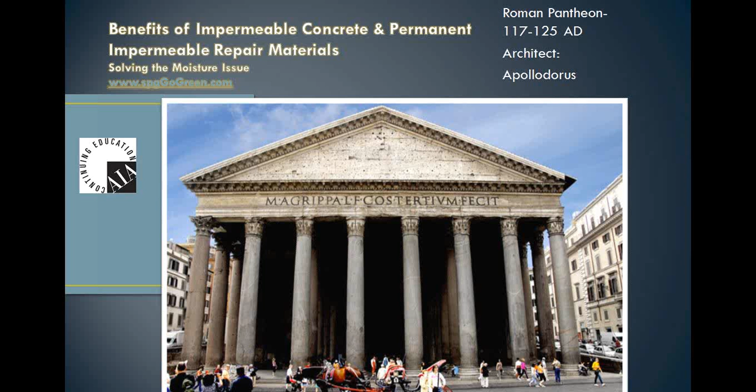Pictured on the screen is the front of the Roman Pantheon, and this building is 2,000 years old. It's just disgusting that we as a society can't come anywhere near that. The 9/11 memorial that the Pentagon had designed, they requested that it last 100 years. We need to change this philosophy.

Today we're going to learn about VOC rules, reasons, impact, but most of all we're going to learn how to make the world a better place to live through the medium of concrete.

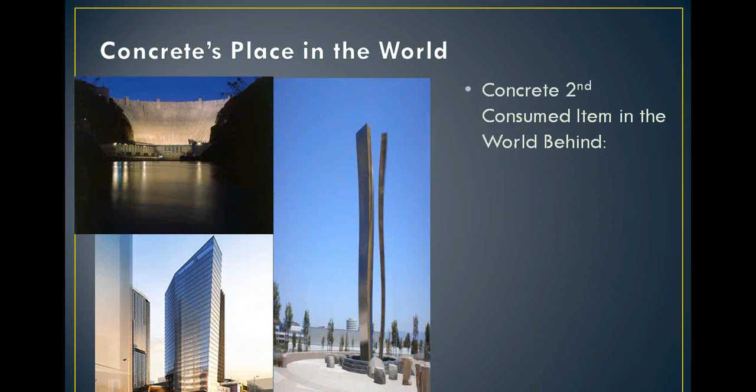Concrete's place in the world is really everywhere. It's the second most consumed item in the world behind only water, as measured by weight.

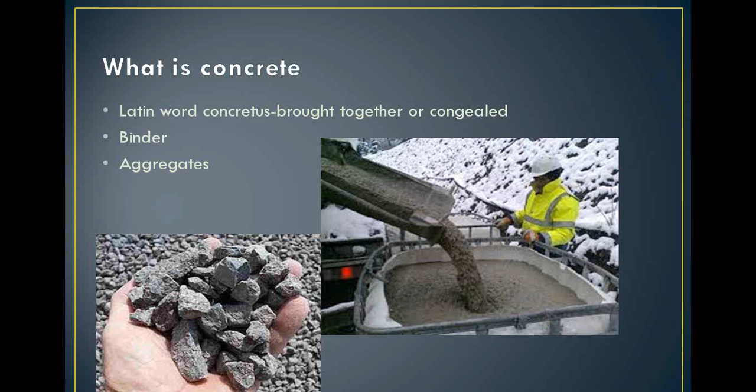Concrete comes from the Latin word concretus, meaning brought together, and it consists of a binder and aggregates. In this case we're looking at Portland cement and stone, but it could be Elmer's glue and diamonds. That would also be a type of concrete. Not sure what you'd do with it, but there you go.

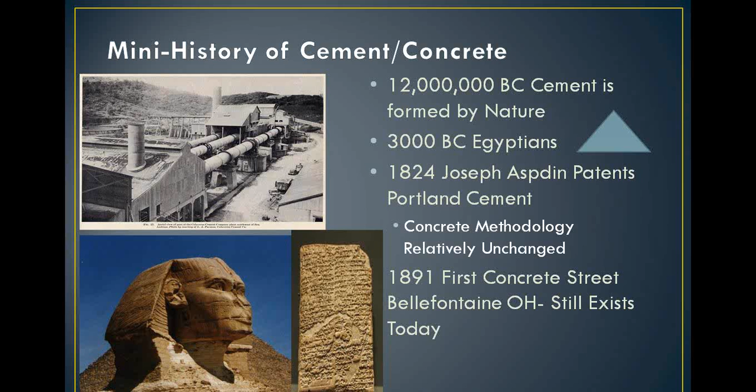Nature formed cement 12 million years ago. And in 1824, Joseph Aspdin patented Portland cement as we know it today.

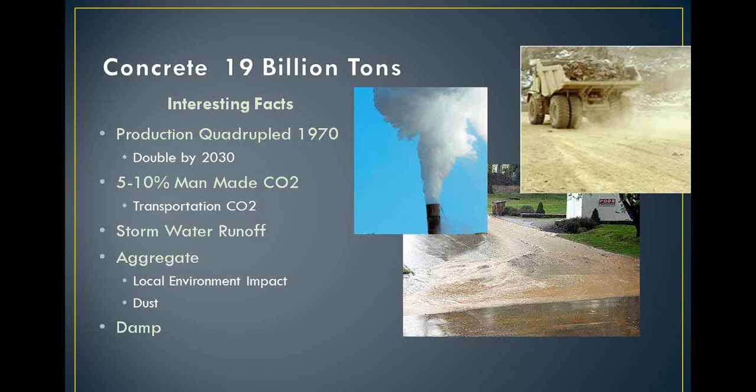19 billion tons of concrete were produced in 2010 - a little behind on my numbers. That's quadrupled since 1970, and will easily double by 2030. The best, most accurate guess we can arrive at is that 8% of man-made CO2 is created through the process of cement production.

So to give you a frame of reference, when you see a full concrete truck driving down the road, it has 18 million BTUs worth of Portland cement in the back of it.

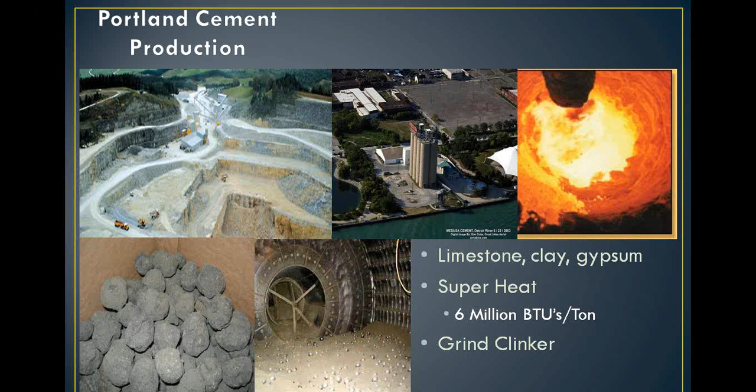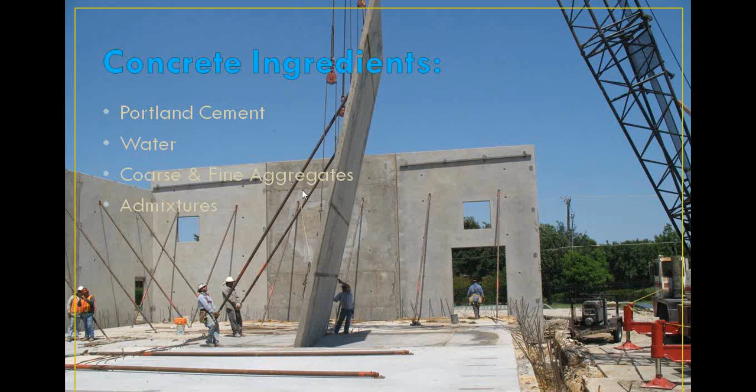Concrete is comprised of Portland cement, water, stone, sand, and admixtures. Not an inch of concrete gets poured in the civilized world without some sort of admixture in it. If you were to take Portland cement out of these ingredients, what you'd have is a pile of wet rocks and sand. So that's where we need to look carefully, because that's where the magic happens.

75% of Portland cement is comprised of tri- and dicalcium silicate. When these silicates react with water, they form calcium silicate hydrate and calcium hydroxide. This is what provides the early and long-term strength to concrete. The additional materials form the completed matrix of the concrete, and that's what you have.

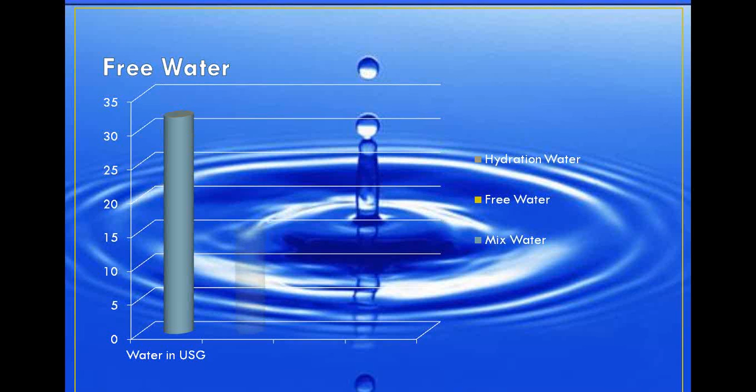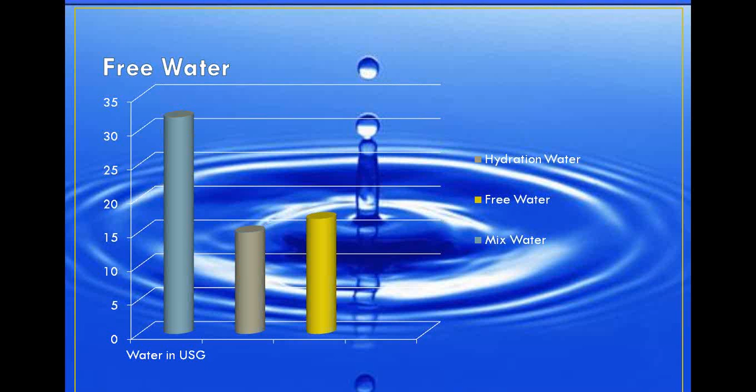What we're here primarily to discuss today is free water. When they make a cubic yard of concrete, they start out with, give or take, 32 gallons of water. That chemical reaction we just looked at, Portland cement and water, uses less than half that water, leaving you with approximately 17 gallons of free water, or water of convenience, in the concrete.

I customize these presentations to each architectural firm that I go to, and this was one of their projects where I most recently gave this. It's a 184,000 square foot hotel, and inside there would have been 38,000 gallons of free water in the concrete slabs, waiting to come out into the occupied space.

A cubic yard of concrete at 4 inches thick covers 81 square feet. So every 8 by 10 area you see at one point in time contained an extra 17 gallons of water. Imagine if I was to dump 3 five-gallon buckets of water into your walk-in closet - you'd be up to your ankles in water. Well, that's what's in the slab. And if it was 6 inches thick, it would be nearly 60,000 gallons of water in there.

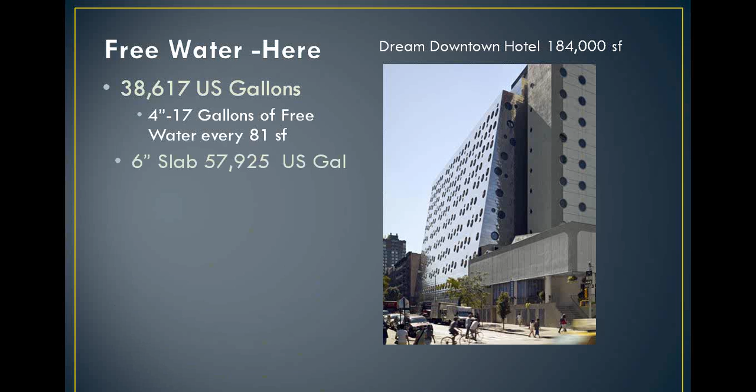Concrete drying times - the ability to get rid of this free water or extra water - are considered to be 40 days per inch of thickness by all industry experts, including myself, under ideal conditions. And these ideal conditions consist of an enclosed, conditioned space. So you build your building, turn on your HVAC, and that's when the exchange of moisture truly begins in earnest with traditional concrete.

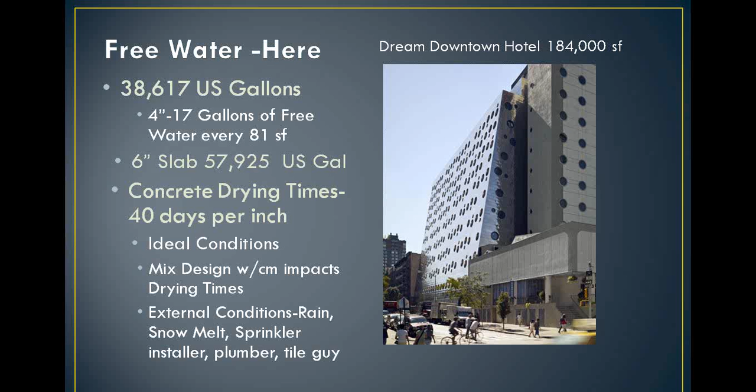Inside that concrete slab, it's 100% relative humidity. And when you condition the space, it now becomes 50%. That exchange is going to occur from the high to the low. And this happens frequently 10 minutes before the flooring installer gets there or the roofer arrives on site.

And this has become a problem because in 1999, the EPA, in an effort to protect us and future generations, lowered the allowable VOC limits inside the building envelope through the Architectural and Industrial Maintenance Coatings Act. And where that had a huge impact was on flooring adhesives.

While they could certainly have the moisture pass through the flooring adhesive, it's going to hit the impermeable membrane of the flooring sitting on top of it and blow it off. And now more and more manufacturers in every phase of construction are beginning to make products that contain no VOCs, and it's extending to roofing, fluid applied air barriers, etc.

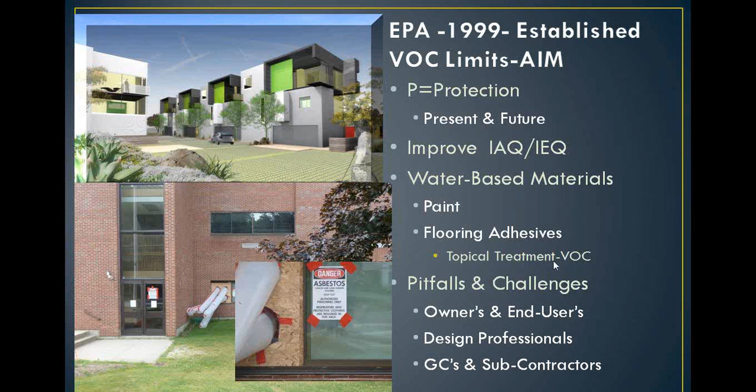Until we came along, the only legitimate solution was a topical treatment on top of the concrete to slow the moisture's passage through to the material. And it travels through the concrete through the bleed channels.

When concrete is first placed, the heavier materials settle to the bottom, water is pushed out, and bleed channels are formed. These bleed channels provide a perfect path for moisture vapor emission to leave the concrete, come up, get underneath this impermeable moisture membrane of a floor, and re-emulsify this now water-based adhesive.

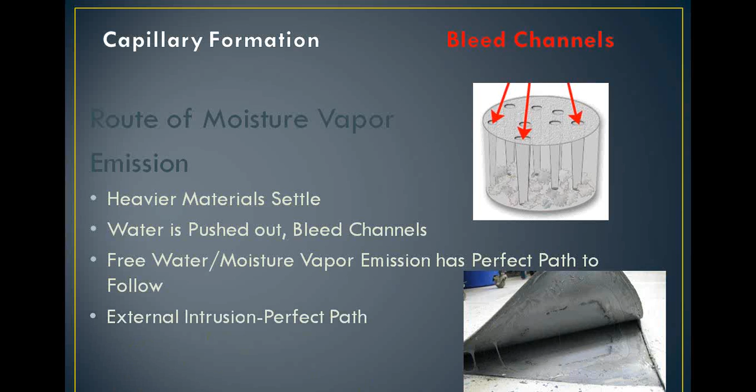So if you could get rid of that water, or the highway on which it travels, you could stop this problem, or go a long way towards solving this issue. If you could make the concrete you put in place outside impermeable, with no bleed channels, you're obviously going to extend its life cycle.

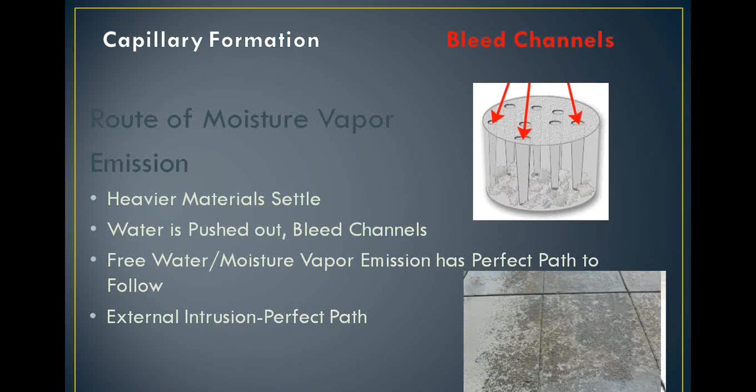We're not going to exclusively talk about flooring issues today, but it's certainly where this problem got its start. Well, we've been fortunate to bring a solution, in that, in most industries, the standard cure for this is a topically applied material.

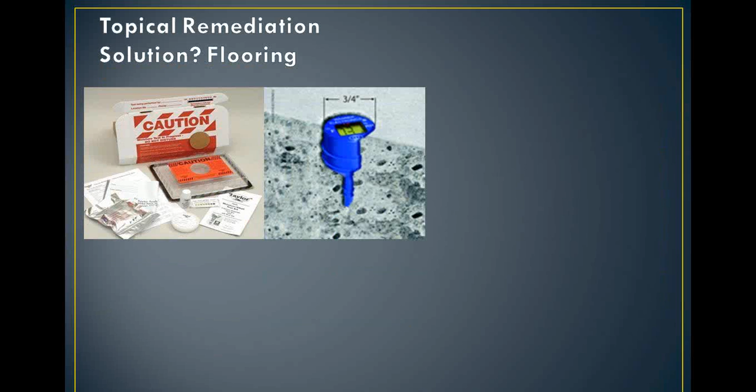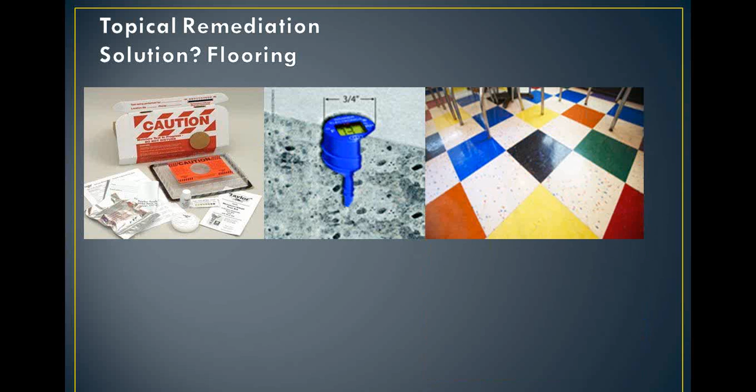First, they test with these items we see here, and if they pass the test, they would install the floor or roof or whatever it is. However, in the case of approximately 60% of the commercial projects, an extra step is necessary.

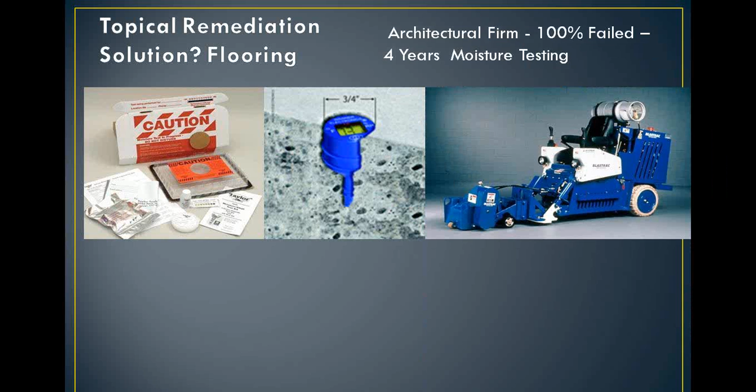An architectural firm in Boston told me that 100% of their projects failed these two tests, so they simply built this into their process. This process is designed to deal with all that extra water in the concrete. So they take one of these machines and run it around the floor as a shot blaster, which shoots lead BBs into the floor, ripping off the top matrix so that this material can be applied.

This is an epoxy moisture remediation material that slows down the rate at which moisture leaves the concrete slabs. It doesn't stop it, but it slows it down. So now they've shot blasted it, put this epoxy on — you can install your floor.

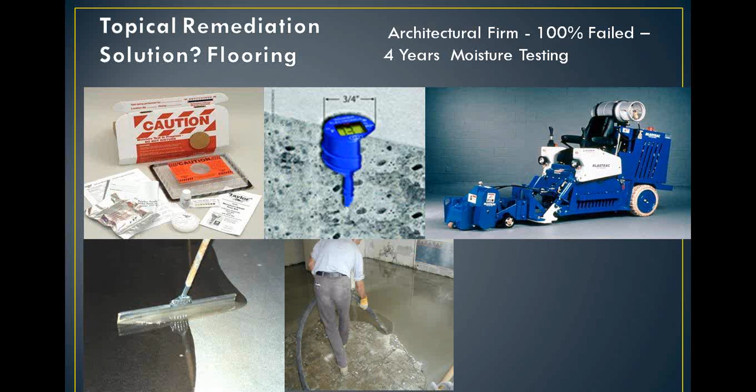No, you can't, because flooring adhesive won't stick to that epoxy. So you need to self-level, and then you can install your floor. That's the process, and as you can imagine, you're looking at $5 to $8 a square foot, depending on where you are in the marketplace.

Not to mention the fact that when you begin putting this epoxy and self-leveling down, no other trade can be in this space — it's shut down from any other activity. It's a project killer.

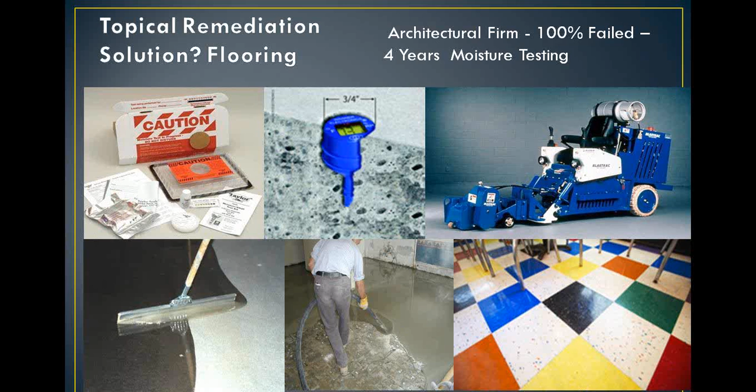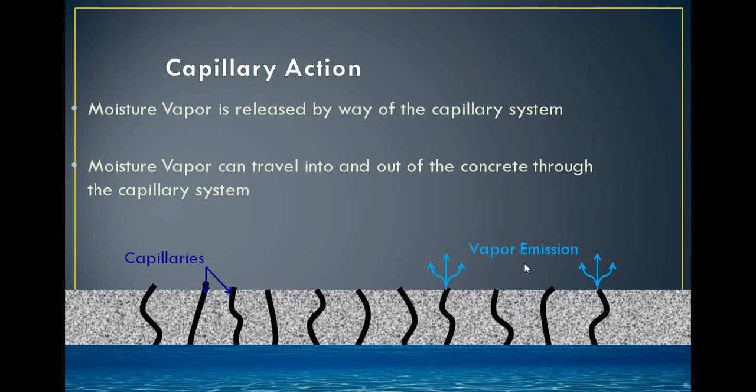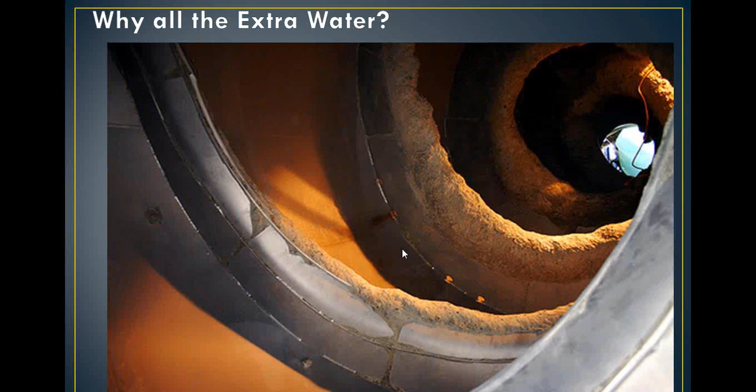One thing that's been suggested is to reduce the amount of water in the concrete. However, in the back end of this concrete truck, inside the drum, there are 33,000 pounds of Portland cement, stone, and sand, and in order to mix that up into a homogeneous, usable mix...

...then it gets dumped into the concrete pump truck and pumped up and over into the job site. Put in place, water acts as a finishing aid and offers some self-leveling characteristics.

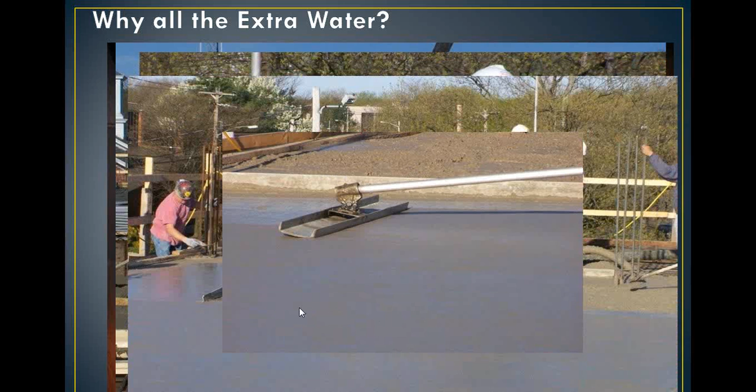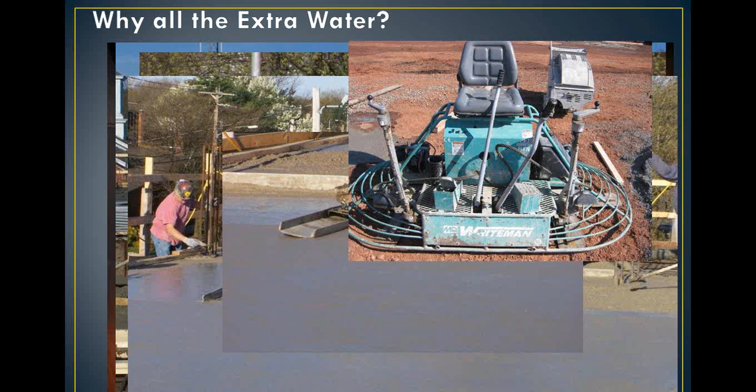And now what they've done here is they've created an interior concrete slab that's ready to perform its two primary functions in the building space. It's there to be a structural element of the building, and appropriately incalculable amounts of engineering time have been spent to make sure that is so.

Its other primary function is that it's there to receive floor covering, because that's the next step in its life. And today we're going to give you a tool so you can engineer that slab to receive floor covering on your schedule.

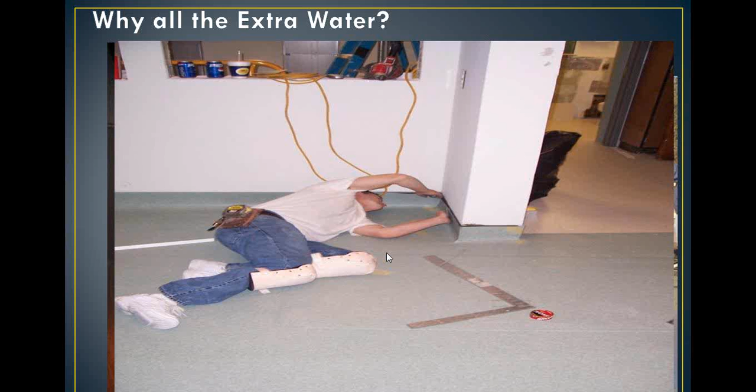This particular type of flooring material is one of the most difficult. It's frequently used in medical applications. It's a rolled material, usually 6 foot 6 inches wide, and where the seams occur, they heat weld it — they run essentially a glue gun down there. So there's nowhere for the moisture underneath to escape, and it blows the floor off because it's a water-based adhesive.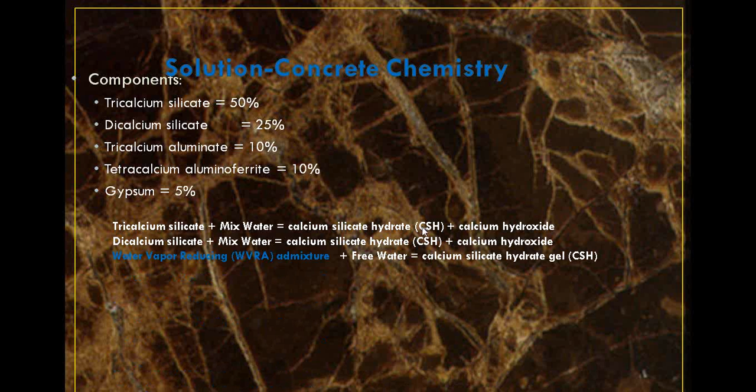So here's the solution we propose. Remember our tri- and dicalcium silicate forming calcium silicate hydrate and calcium hydroxide. Well, our water vapor reducing admixture reacts with the calcium hydroxide and the free water to form additional calcium silicate hydrate gel, where the capillaries of the concrete would be in traditional concrete.

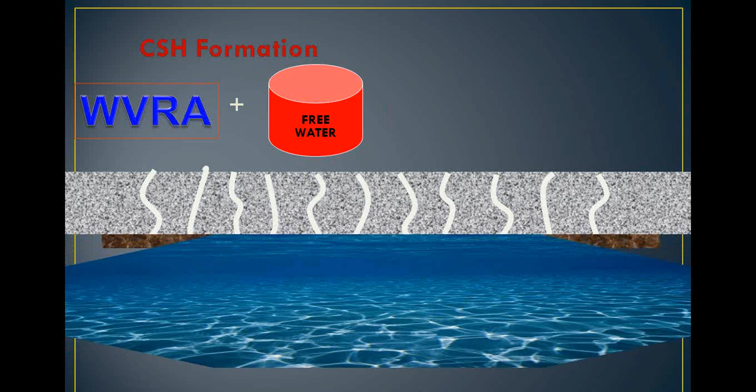This is what it looks like. The water vapor reducing admixture reacts with the calcium hydroxide plus the free water and makes this slab impermeable. If this were your basement or garage concrete floor, you could now take a cardboard box filled with your most precious mementos and set it on that floor, and it's not going to get damp and moldy.

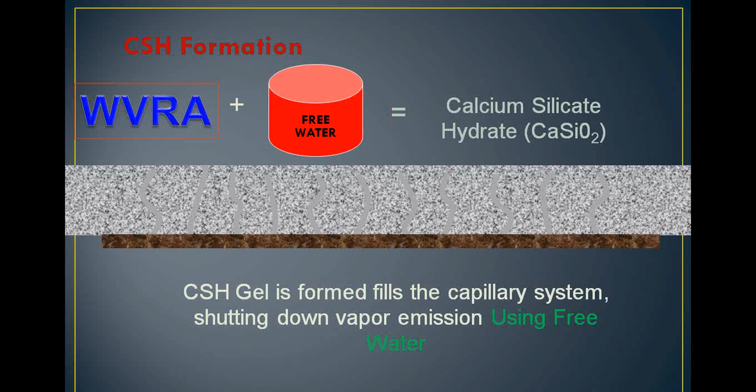Making more of this, filling in more of these holes. On all of our warranted projects, we send out cylinders taken from the concrete truck at the time of placement to an independent lab where they conduct this test. We send them a 4-inch diameter by 8-inch cylinder, and they slice a 2-inch hockey puck out of the center of it, and push water through it.

In this particular test, the results were 5.17 times 10 to the minus 11th centimeters per second. If you do the math on that, it means it would take 6,318 years for moisture to pass through a 4-inch thick slab.

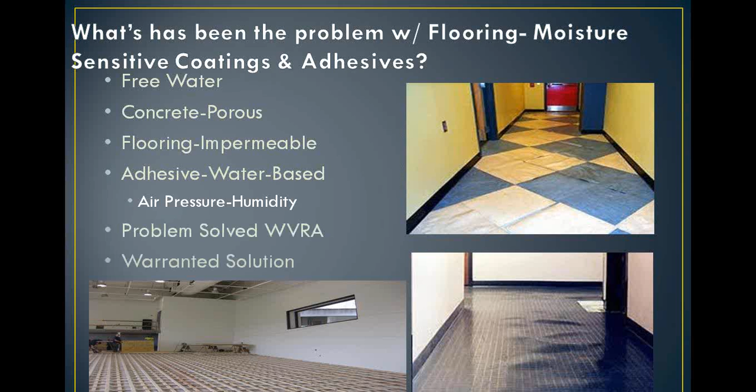When you're looking to select a proper water vapor reducing admixture, you want to make sure that food-graded reactive materials are being used for consistency. And make double sure that the manufacturer you're using has a solid factory quality control program in place, and possibly most importantly, that there's an active field QA and QC program in place. And of course, it's imperative that they have ASTM C494 Type S approval for admixture as well, to hold any of the stakeholders harmless in the event of some sort of a calamity.

There should be factory-trained ready mix providers and finishers, and you should provide a full warranty to the project, material and labor, to replace any material that's failed due to moisture vapor emission.

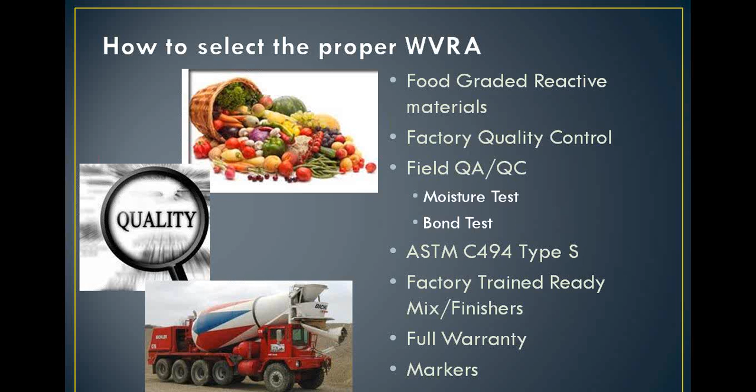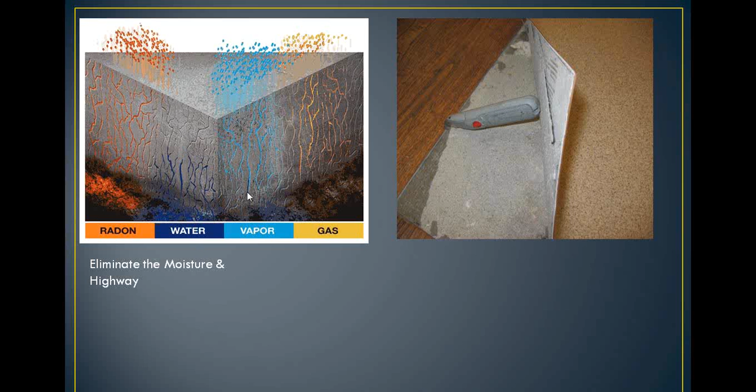So in the real world, you can see this is water here, but this is vapor. Vapor comes right up. It takes a good push to get the water through, but vapor floats up. So if you could eliminate these highways and the water that's creating the vapor, you could stop this problem.

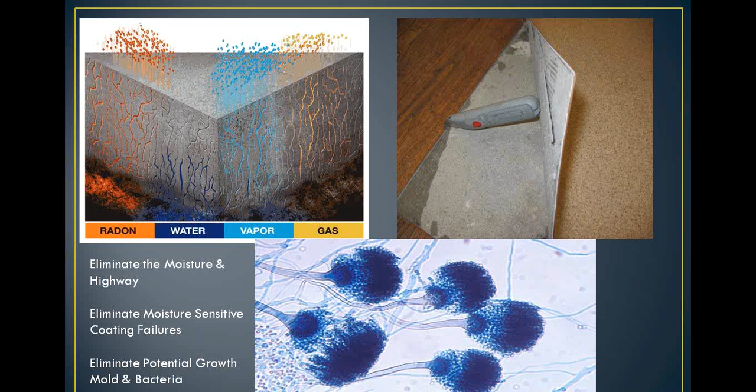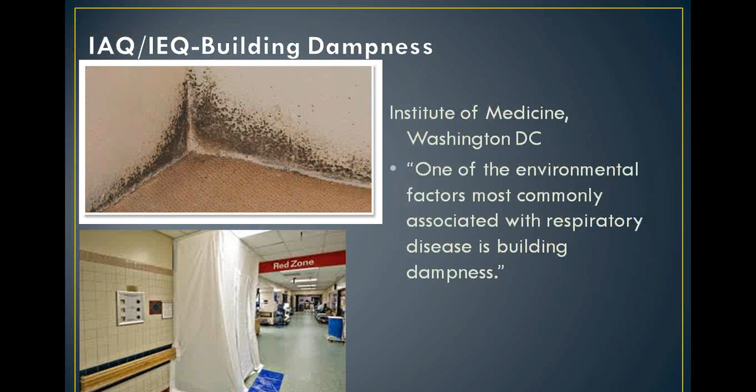So if you could take your 70,000 gallons of extra water out of that building, and make it into more of what makes concrete strong, you're going to provide a healthier interior environmental quality.

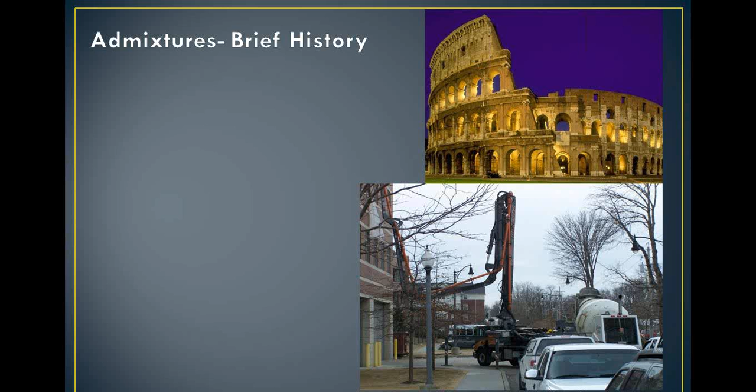A brief history of admixtures. In 300 BC, the Romans used a variety of things, blood, milk, animal fat, to make concrete less permeable and to increase its longevity. And to this day, there is some derivation of animal fat being used in concrete.

In 1975, the water vapor reducing admixture, as we know it today, was brought into the marketplace to be a waterproofer and a workability aid.

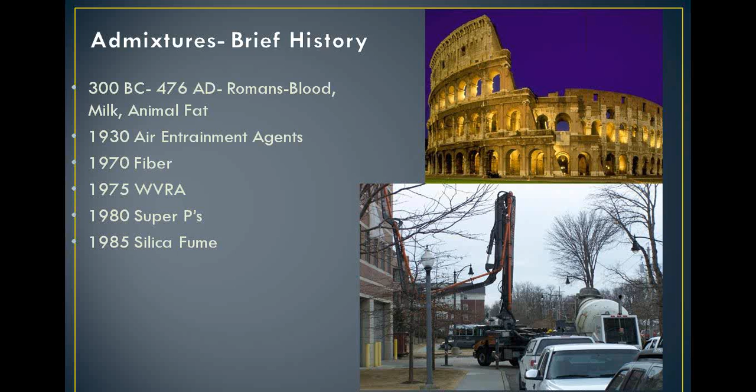The secret to the performance of water vapor reducing admixtures and to the outstanding benefits it provides is that it internally wet cures the concrete. It converts that extra water into calcium silicate hydrate gel, which has a moisture content and acts as a wet cure.

So all the problems that are eliminated when you wet cure concrete are eliminated by internally wet curing it as well. And you truly have a superior concrete slab.

We have people using this material who are just looking to improve the quality and workability of the concrete. They're not putting any flooring or anything on top of it.

We've done projects all over the world, and really only in one case have we ever had any sort of plastic shrinkage cracking reported to us. That was in the Mojave Desert. It was 100 degrees, it was sunny, and it was windy. They, however, were still able to use the slab, no problem.

With the other millions and millions of square feet that we have in, not a single plastic crack, because that's all about curing.

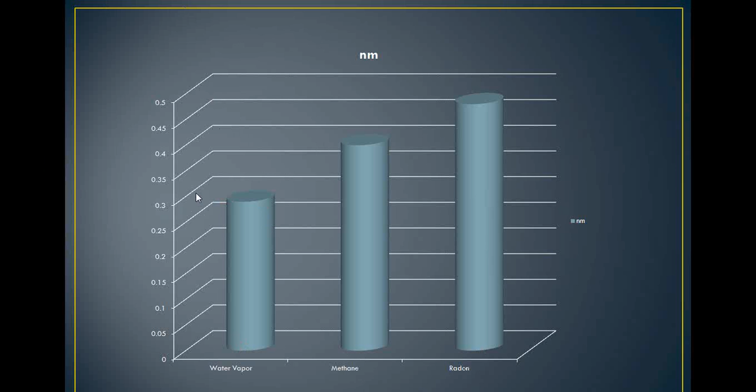When you have water vapor reducing admixture in your concrete that won't allow the passage of water vapor, it certainly won't allow the passage of methane and radon. This is a chart showing the size of these various molecules. Water vapor can't get through, radon can't get through.

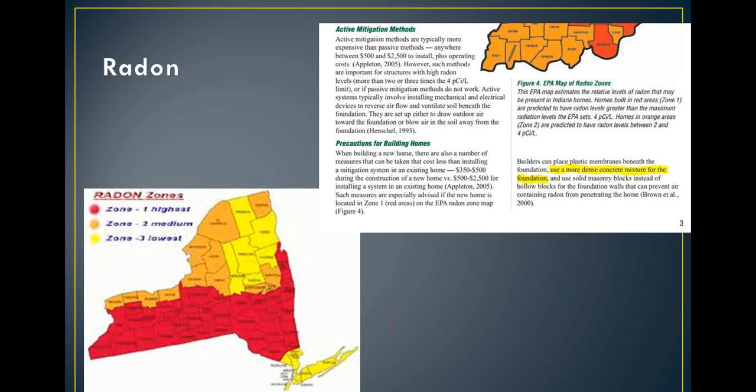I last gave this in New York, so I have their map there, but radon's a huge problem everywhere, as we know. One of the things they recommend, this is from Purdue University, is to use a more dense concrete mixture for the foundation and the floor. So that's what we're providing.

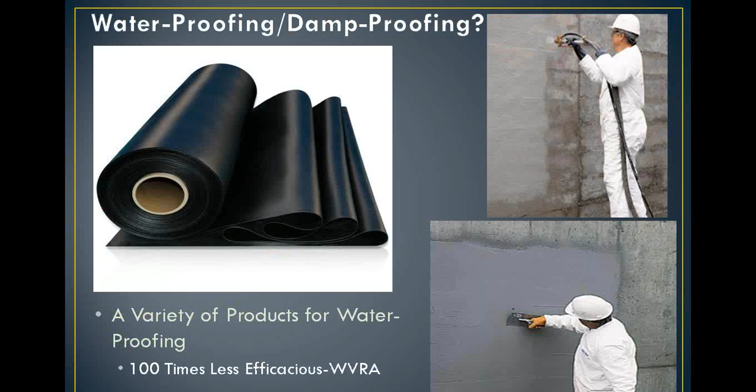There are any number of materials that can be post-applied to concrete to make it water and damp proof, but not one of them is as efficacious as the water vapor reducing admixture, and every one of them is more expensive.

If you're doing tilt wall, you can stand that wall up faster. You wouldn't need any additional air or waterproofing membranes.

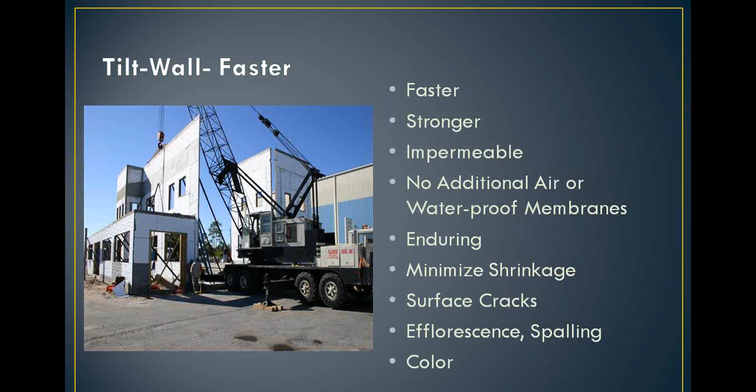One of the things we haven't talked about yet is color. When you see a concrete slab, it frequently has a white mottled effect to it. But when you see a slab that has water vapor reducing admixture in it, it looks much more monolithic, all one color, almost as if it's painted. The reason for that is traditional concrete allows moisture vapor to flow through it and carry bits of portlandite and salt deposits to the top of the concrete. Water vapor reducing admixture will not allow that. That's one of the ways you can tell that we're in there, just by the appearance of it.

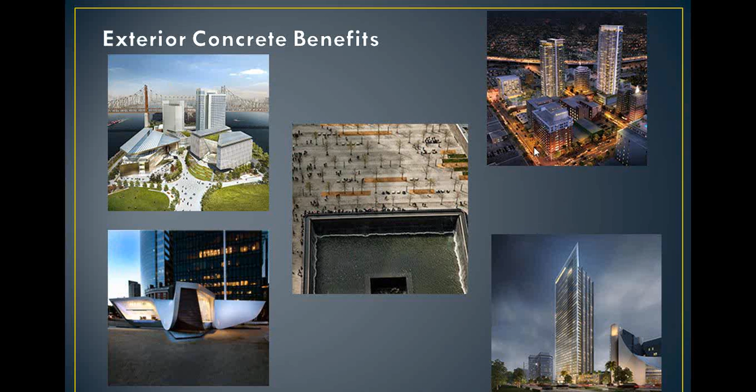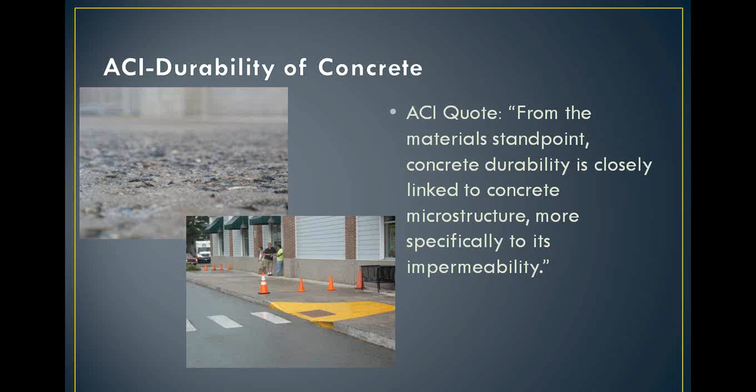You think about the benefits to exterior concrete, they're tremendous. The American Concrete Institute talks about concrete durability being a function of impermeability. And I think inherently we all understand that.

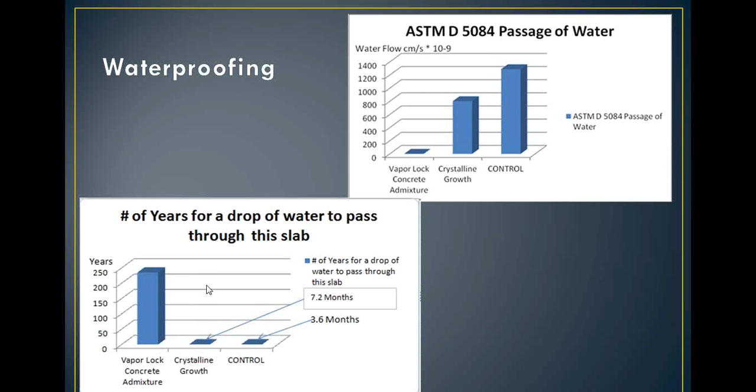You talk about waterproofing, keeping things out of the concrete. This is water vapor reducing admixture. This is a crystalline growth formula. It took 250 years for moisture to pass through this test sample, and it took 7.2 months here and 3.6 months against the control. So they certainly are doubling the waterproofing capacity, but nowhere near impermeability.

Talk about rebar for a minute. You know, rebar rusting is really a product of overcarbonation of concrete. Inside the concrete matrix, the pH is about 11.5 to 12, and rebar can't oxidize there even if water gets to it. However, as concrete carbonates from the top down, it will lower the pH and allow for the rusting of the steel inside there.

So by disallowing formation of bleed channels, you virtually stop overcarbonation of concrete. Freeze thaw and UV are major issues in this area, and we stop the negative impacts of that.

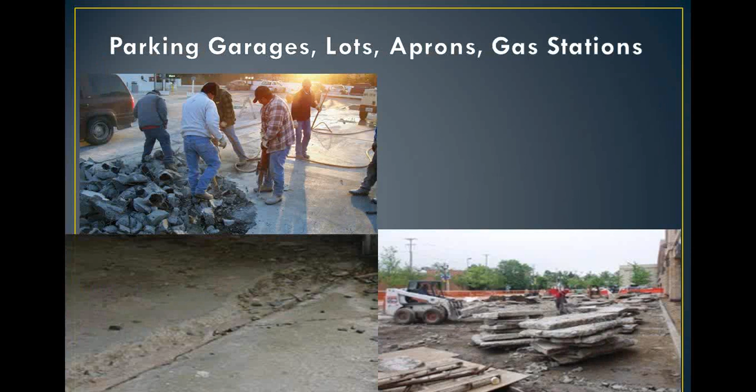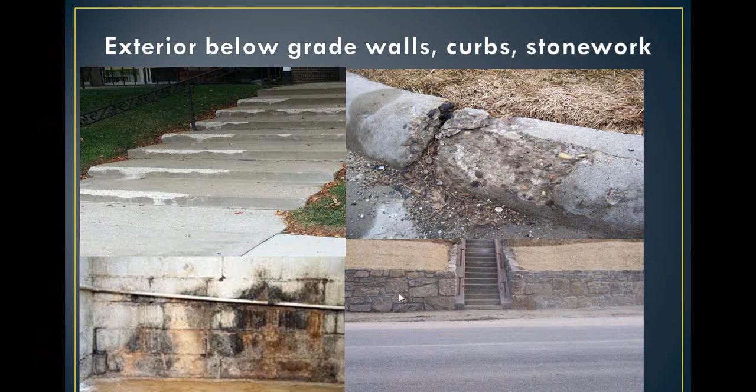All these things are a byproduct of a capillary system, free water. Had this concrete been placed properly, they wouldn't be replacing it here. On the lower right, we have an interesting little thing. They used a water vapor reducing admixture in this mortar, but not in this mortar. See the efflorescence forming? No efflorescence. No capillaries, no efflorescence.

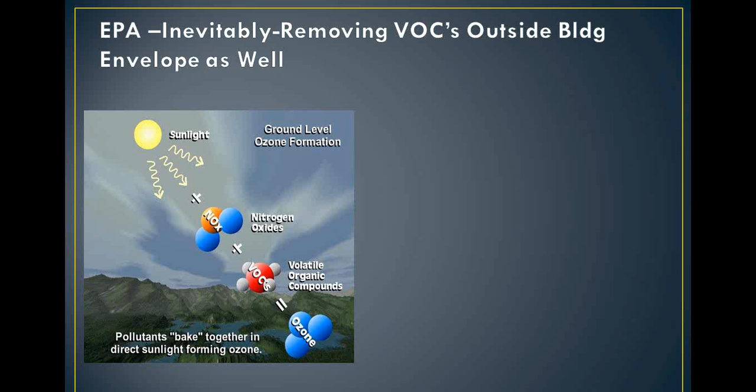Here's a few waterproofing applications. Regarding what goes on with the EPA and making more things waterproof, eventually they'll get around to it. But in the meantime, manufacturers are constantly being forced to put out information about the VOC content of their products, and less and less is it acceptable to have VOCs in there. So we're all eliminating VOCs in the process, and we're running into this practically every day now with roofing manufacturers asking to use our system to solve their problem.

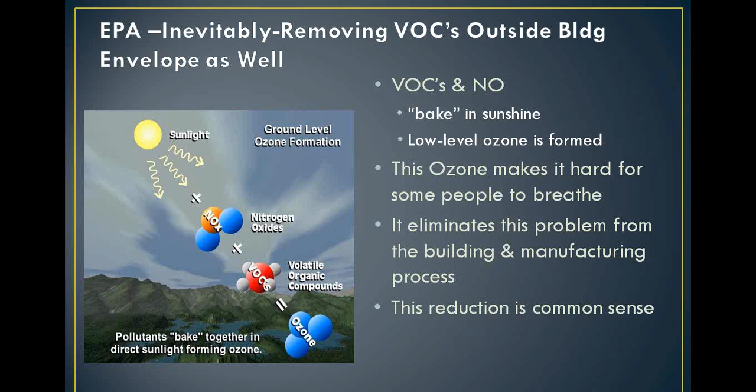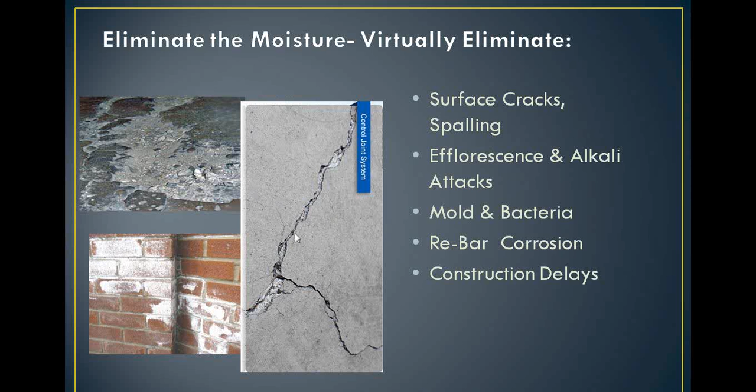The improvements to concrete by controlling the free water and the bleed channels are endless. All the problems with concrete are a byproduct of bleed channels, uneven expansion, free water leaving at different rates in different parts of the concrete.

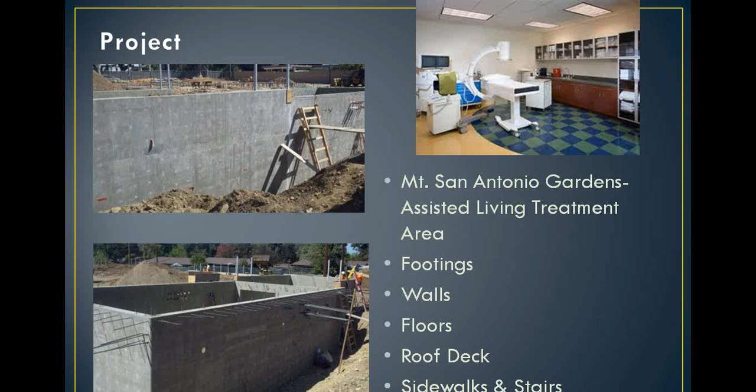The benefits of a water vapor reducing admixture are absolutely endless. By wet curing that concrete, you're just dramatically improving its performance.

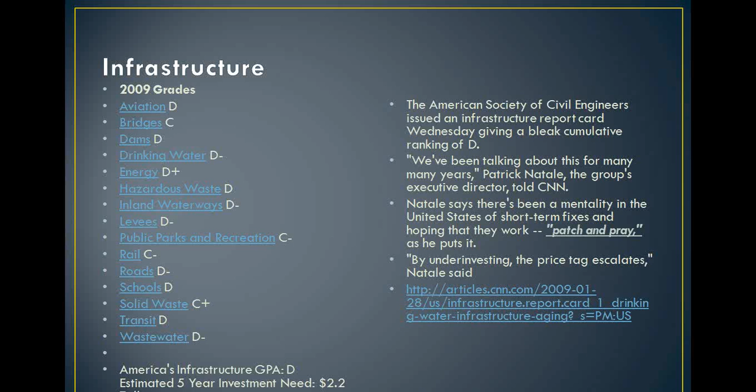We're going to shift gears now and talk a little bit about infrastructure. Here in the U.S., we received a D. The executive director of the American Society of Civil Engineers makes the following statement: the problem is that there's been a mentality of patch and pray.

Well, I would say two things to Mr. Natale: A, if you put concrete in place that's impermeable, you're not going to be in the same position, you're going to dramatically extend its longevity. And B, if you do need to repair concrete, make sure you repair it with a material that's impermeable.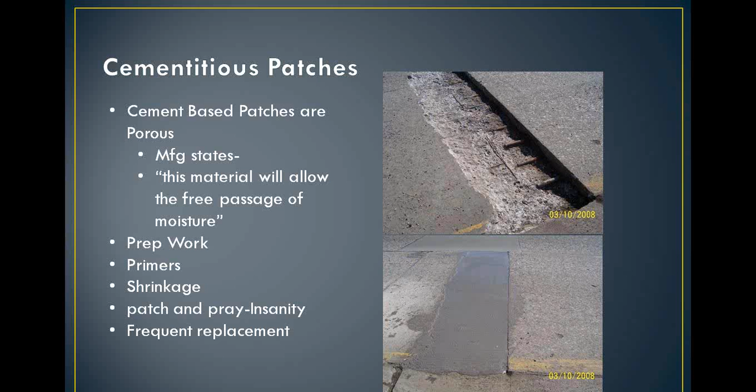Cementitious patches, Portland cement-based materials, aren't dramatically different from what they're fixing. They allow the free passage of moisture, which is the reason you needed to repair it in the first place.

We recommend an ionic bonded material, a two-component system that is impermeable. No primers are required. The prep is a little less limited in that you don't need to dig under the rebar for it to grab, because it'll grab nicely onto the face of the rebar. Of course, we want you to be down to dry, sound concrete.

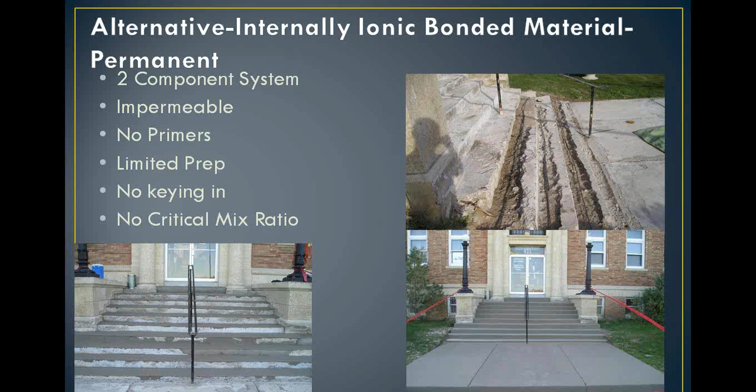And this product can be used with no critical mix ratio, so you can use it horizontal, vertical, and overhead, and not lose any strength through more or less liquid being added. This is an ionic bond over here.

It bonds directly to the substrate, and the weakest point of the repair at that point is the substrate. If this was our repair material and you were to knock this off sideways with a hammer, it would absolutely take some of the concrete with it because that bond is so strong.

Acrylic modified Portland cement-based materials sit on top of a primer or a bonding agent. They don't bond chemically and physically the same way that we do, and that's why the failure rate is so dramatic over here.

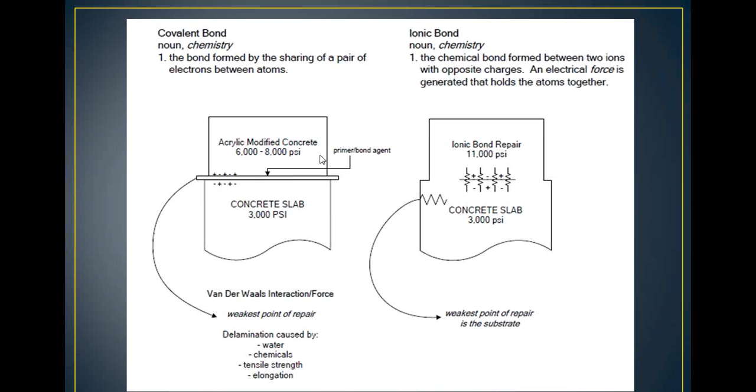That's why it's called a patch. A patch is what you do until you do it right.

When you use an ionic bonded repair material, the real key to the thing is the bond. It just bonds, bam, it's not going anywhere. Zero shrink. It will follow the concrete as it grows and shrinks. We have the testing to prove that.

We set out to make a permanent repair material, and we accomplished that goal, but it also happens to be fast setting. You can walk on it in 20 minutes, you can drive on it in 1 to 2 hours.

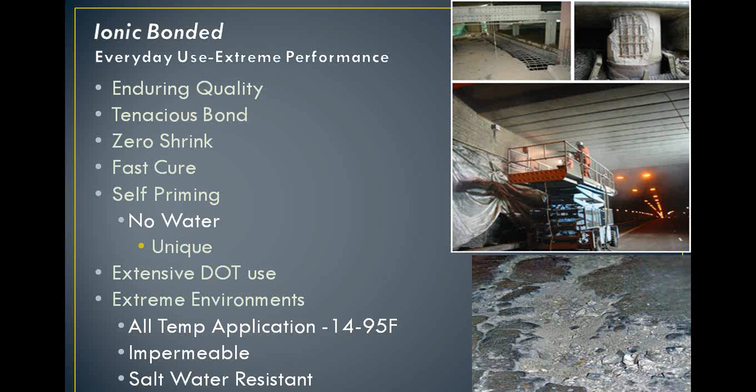We do lots and lots of DOT work throughout the world, and you can use this material down to minus 14 degrees Fahrenheit, which I believe is minus 10 Celsius, and it's impermeable.

So if you're looking to do some repairs, you should use a permanent, long-lasting repair material that is impermeable with a tenacious bond and fast return to service. Even on the front end, projects tend to be less expensive because there's great labor savings to be had, and over the life cycle the cost is lower as well.

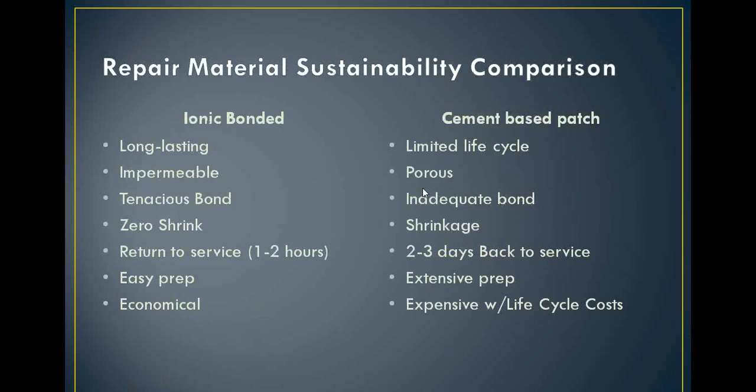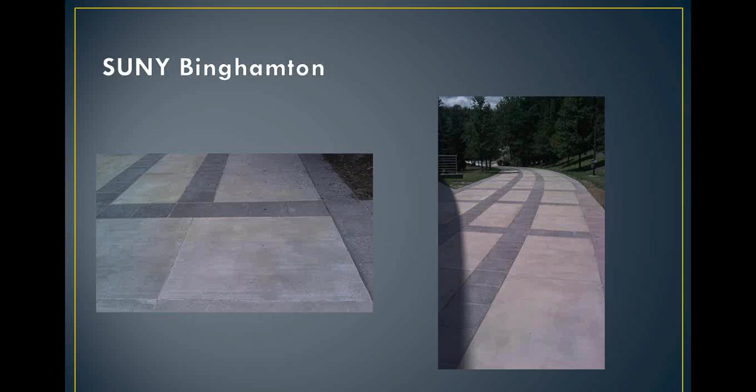These are some repairs we've done using this ionic bonded material. Gas stations are a huge problem in the world, of course, with gas going into the porous material. You go through, do the deep fills, overcoat it. They were able to do this while the gas station was still open, and once the prep work was complete, they were reopening it for business in 3 to 4 hours.

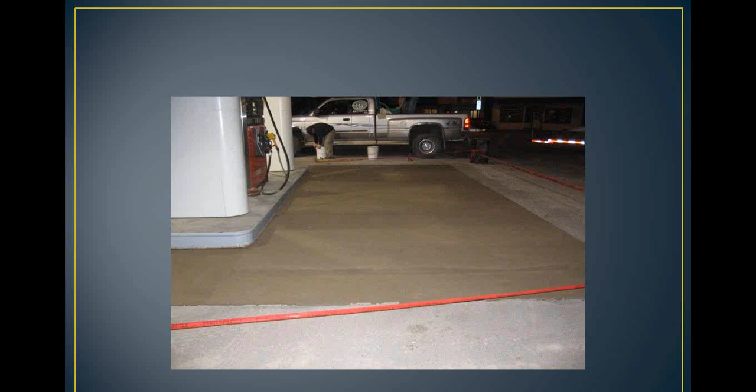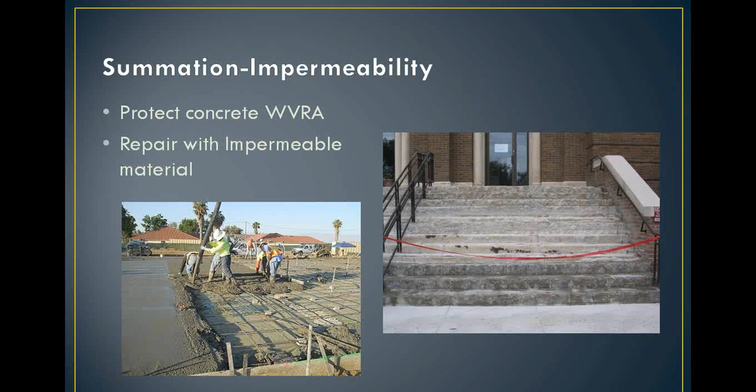You can slope it. So, in summation, protect your concrete with a water vapor reducing admixture, solve your adhesion issues, and if you do need to repair concrete, repair it with an impermeable material.

This concludes the generic portion of our program.

The most important thing that we bring to you, the Specialty Products Group and IMCO Technologies, is quality. We take the highest order of raw ingredients and work from there. Absolutely any time you pick up a bucket or bag of ours, we are best in class. Every time.

We've been talking about VaporLock concrete admixtures as a water vapor reducing admixture. We're absolutely the best tested product on the market.

Something that's unique to us in this segment, and really within the entire concrete industry, is the fact that we have markers inside there. So through a targeted spectrographic analysis, we could take a core from this project here, 10 years later, and identify the fact that we were or were not in that concrete.

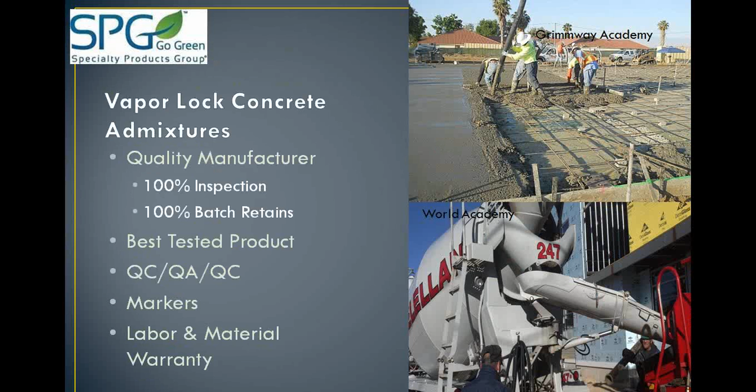And we provide a full labor and material warranty in the event of a moisture-related failure. That's VaporLock 2020. VaporLock 2021 for waterproofing, waterproofs concrete and densifies it to an unprecedented degree. We have NSF approval to use that in potable water applications.

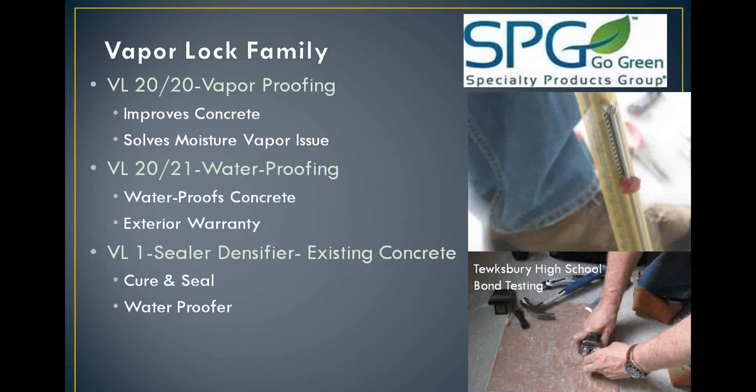We make a variety of topical products that can be applied. They use the same chemistry. They penetrate into the capillaries, react with the calcium hydroxide, form CSH gel, and fill up the capillaries of the concrete to water and vaporproof it topically.

The Specialty Products Group is pleased to offer MG-Krete, which is the ionic bonding material we discussed earlier. Zero shrink, bonds tenaciously, and in 45 minutes it's 2,600 psi, 11,000 at 28 days. So you can see you can use this in horizontal, vertical, and overhead applications.

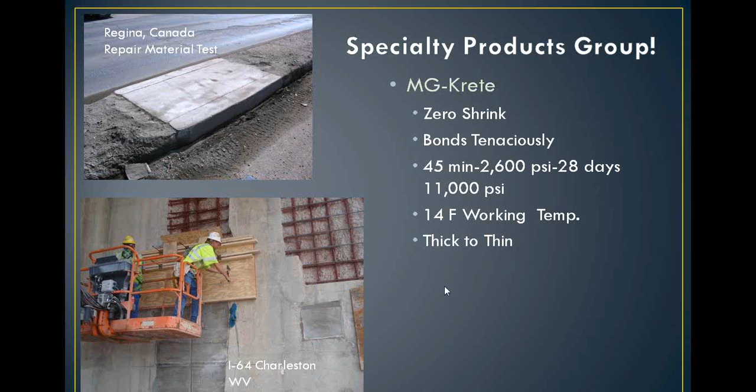It's amazing. We make a cool roof product, which is a two-component roll-on system that contains a photocatalytic titanium dioxide that acts to clean the environment and as a self-cleaning agent for the roof. We make an adhesive and coating stripper that contains no VOCs. We clone first-generation microbes to consume hydrocarbons. We have a mold assassin, no VOCs, no bromides.